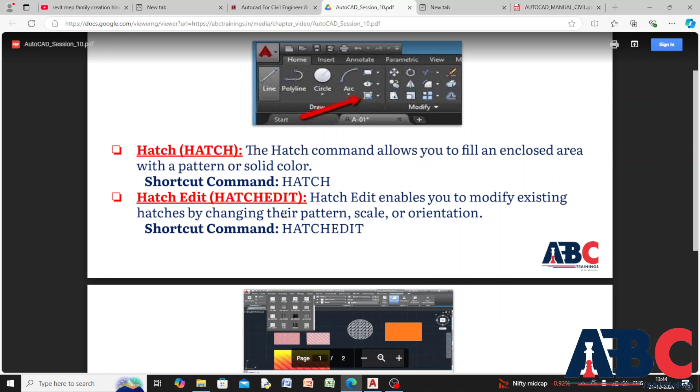Similarly, when we are doing edit for other lines, polylines and other works, here also we are going to edit hatch edit. Hatch edit allows us to modify the hatch. Then we are going to learn gradient, boundary and hatch setting. I will show you how to use all these settings and hatch techniques in AutoCAD.

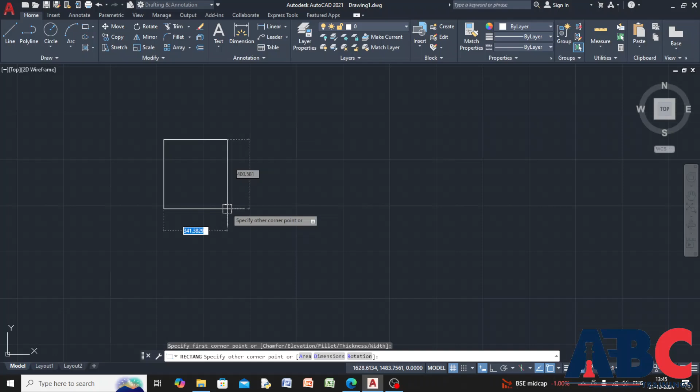I will draw one rectangle so I can show you. See, assume this is my section of a beam. Then I will draw one slab section.

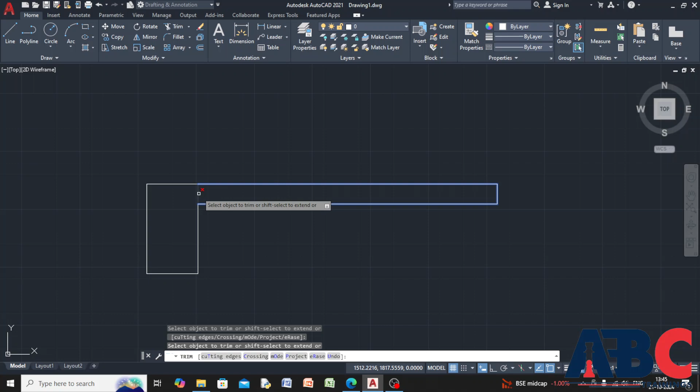I will trim it first. Trim - if you don't know how to trim, you can learn from my previous videos. Close it. Then I will show my bars, that is 4 bars.

Then you can learn easily. I will copy it at the center, then make it ortho so I can make it vertical and horizontal properly. Escape. Then I will copy this, otherwise I will copy this. CO, enter - this is the shortcut key to copy.

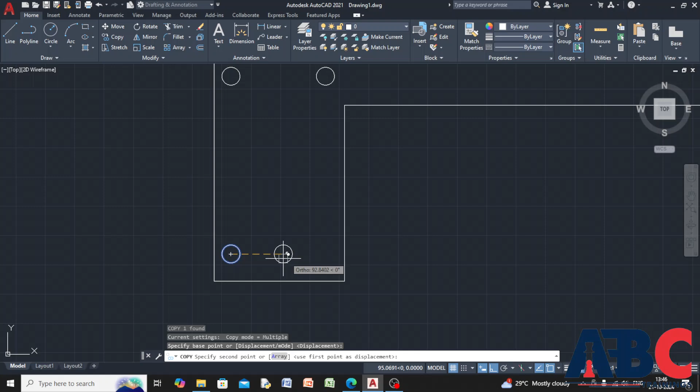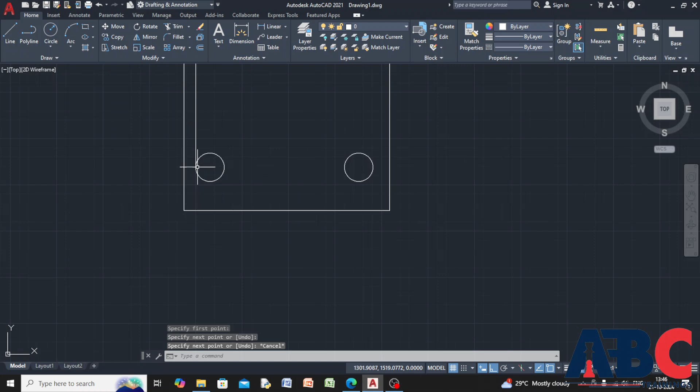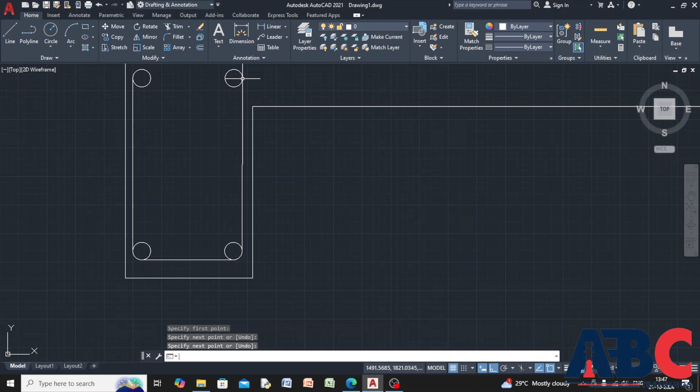If you want to learn the copy and modification tool, you can see my previous video. Now I am going to only show you the beam, tangent, tangent. I am going to provide stirrups. Close ortho mode.

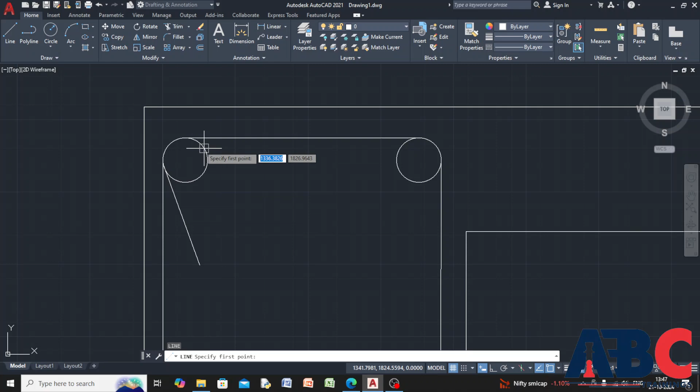And this is your stirrup bend. Okay, now see. Now I am going to fill the concrete in this section, in the section of the beam.

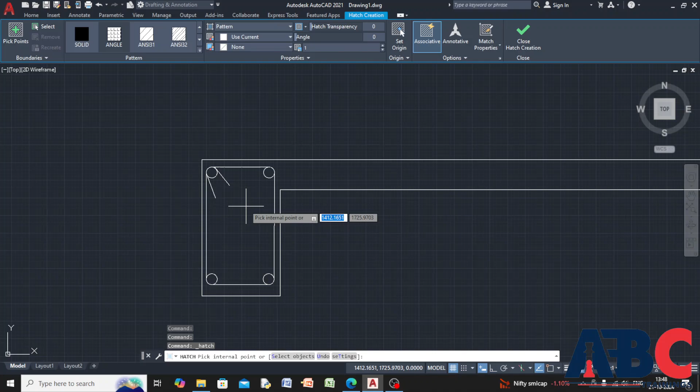Come to the hatch. See here 3 points are available: hatch, gradient and boundary. First I will choose hatch, pick close boundary. See that mat is showing here.

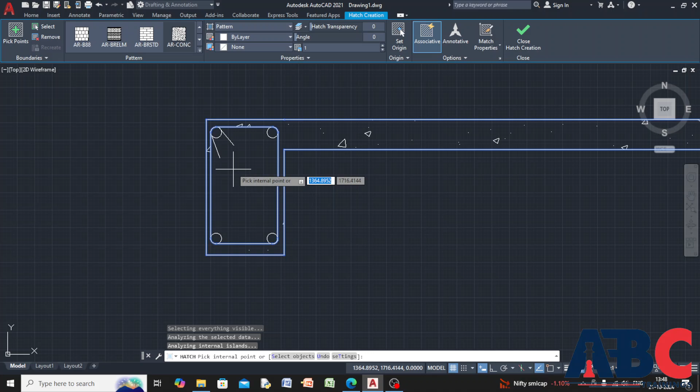Now I want my concrete. Click on the drop down arrow, and this is concrete. See, I have concrete in this section and this also.

Okay, then escape. Now I want concrete in this section also. So how can I do it? Then the option is hatch edit. Double click on it. Now the palette is open, hatch editor.

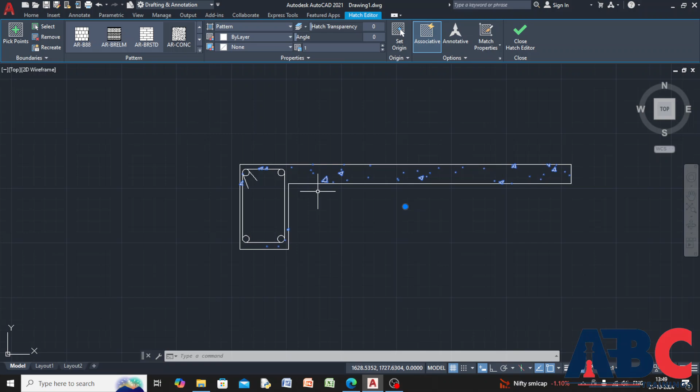Then what you want, the scale is bigger than our drawing. I want to make it less. I am going to reduce the scale. I'm going to reduce it. Now it is not happening.

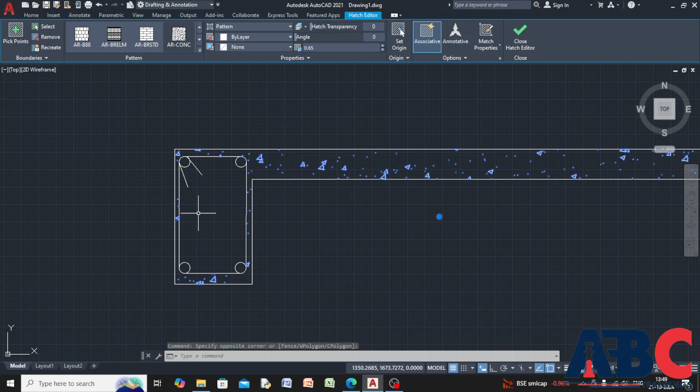Then I will continue reducing. See, the hatch is only applied in this section. Again I will click on hatch, concrete hatch, and put it inside. This is this concrete block.

If you want steel mat, then I will show you how to use it. Click on hatch, angle,

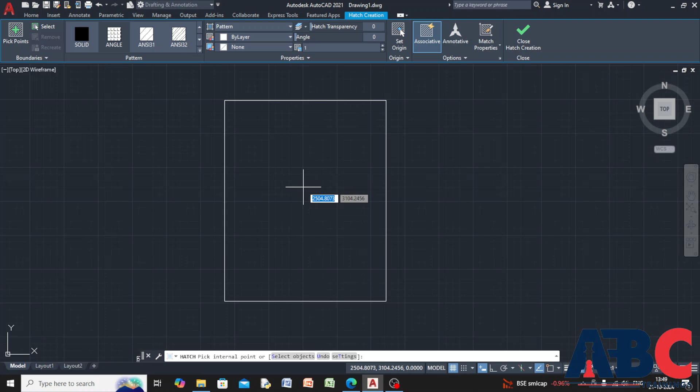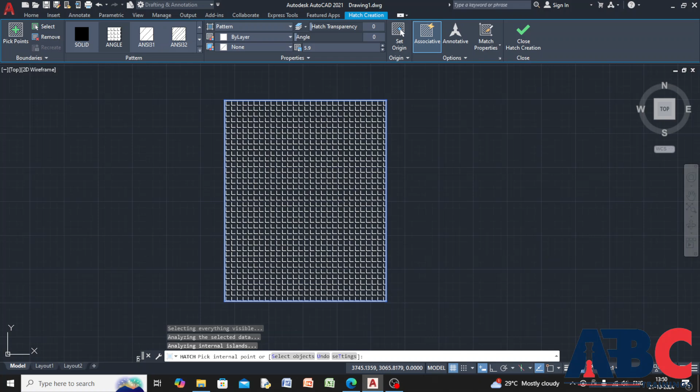then I'm going to reduce. No, I'm going to increase. See, this is trial and error. So whatever you want, you just first reduce. Like this you can also show your mat, or another option if you want to show bricks.

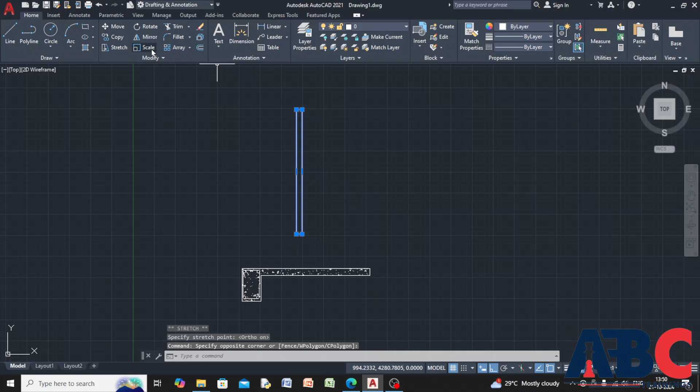Let's assume this is my vertical wall. I will make it wall-like structure so you can imagine easily. We'll move it, then you can imagine very properly. Move here.

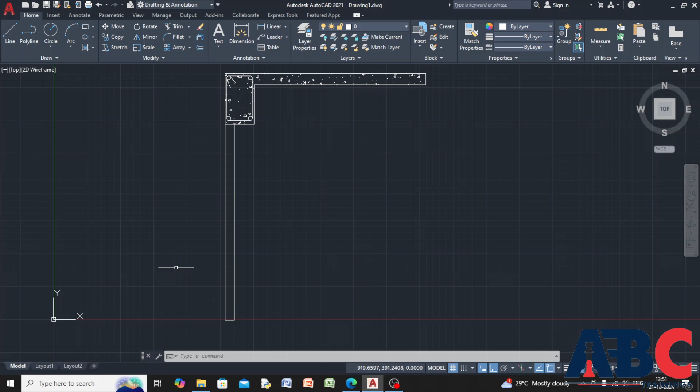Let's assume this is my external wall, and this is my beam, and below the beam the bricks are available. The brick section I have cut from this line. Now you are seeing the cross section. Then I'm going to show you hatch, brick hatch.

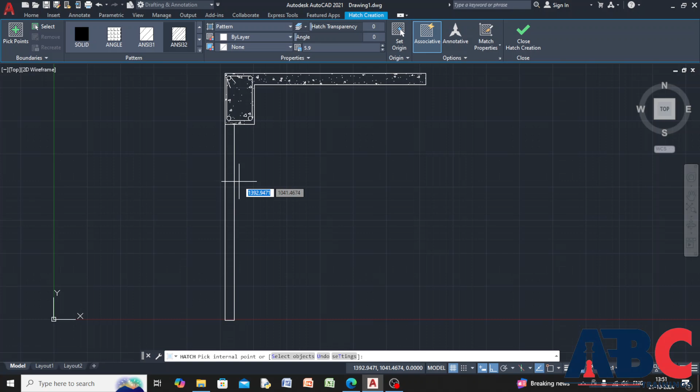This is for civil engineering - this is for coursed or uncoursed masonry, and this is for brick masonry. Click on it, escape. Hope you understand till now.

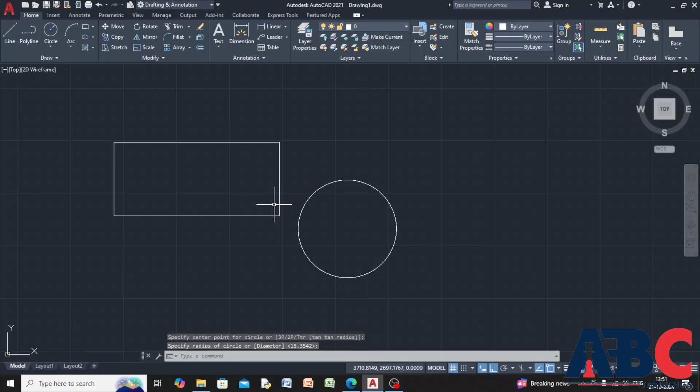Then I am going to show you how to use gradient. In this area I will make one rectangle or some circle. I'm going to use gradient. Put and click it, just simply gradient.

Now you want to edit it, click on it, double click. You can adjust the angle, you can adjust transparency, tint also you can adjust, color you can change.

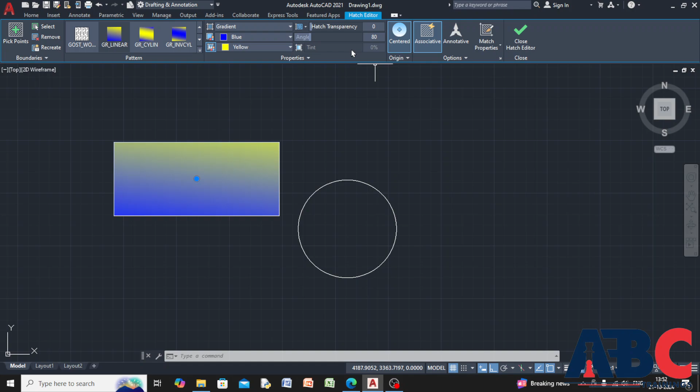Then close the hatch editor. Close. Hope you understand what is gradient. Escape. Then boundary - it will ask for your boundary type, polyline, current viewport.

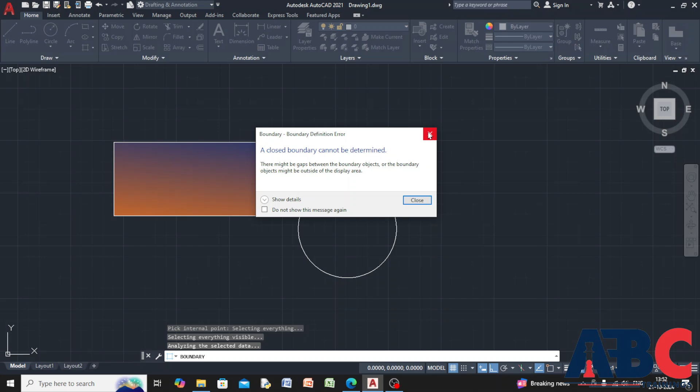Give some boundary. See, this is close the boundary, enter. It will show. The concept of boundary is when you are going to give the command of gradient or hatch, it will always ask for the boundary. It will always ask to close the boundary. So at that time you just first check whether boundaries are open or closed. It will show you the open boundaries, it will not choose them.

Click polyline. I will click it. See how it is showing an error. Now I am going to click on close the boundary. Click on it. Okay, and enter.

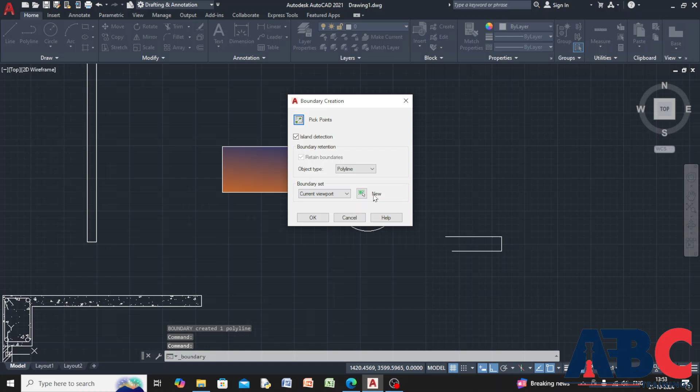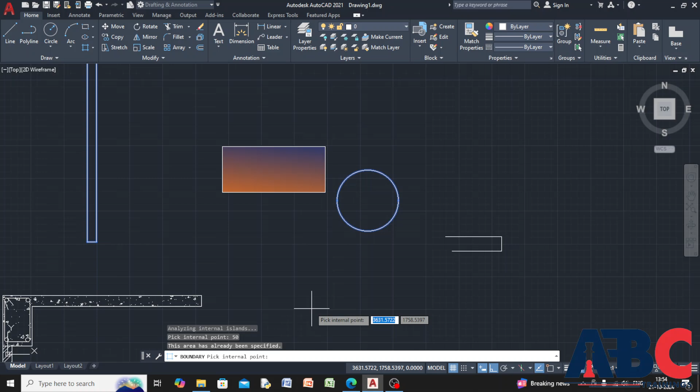Hope you understand. Here also I am doing polyline option. Also it will ask current viewport. We'll pick this point now and this. In the command line you can see the boundary pick internal points. We'll put some value, 20, 50. This area has already been specified, I'm going to just show you, that's why I put a value. Hope you understand what is boundary. Thank you.